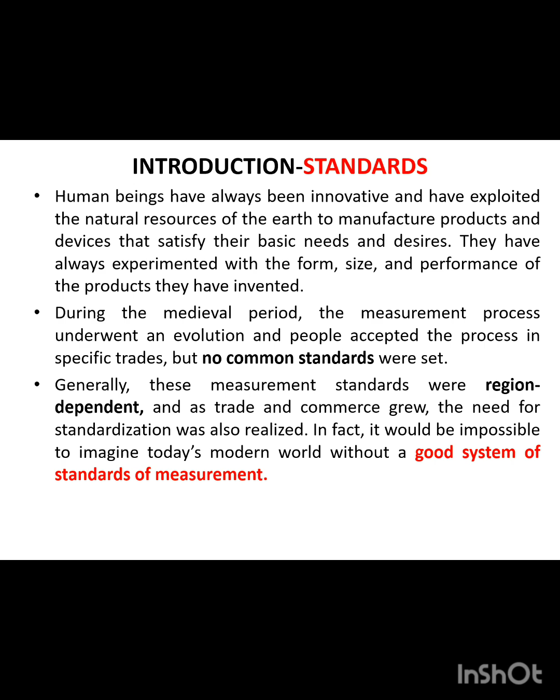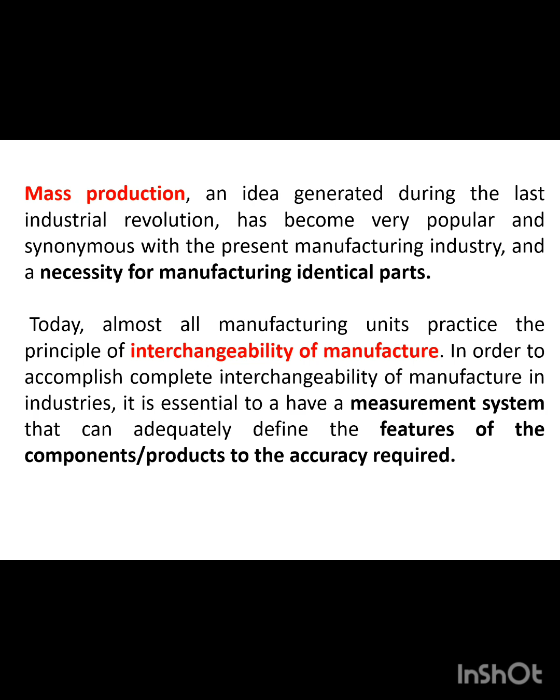Mass production, an idea generated during the last industrial revolution, has become very popular and synonymous with the present manufacturing industry and a necessity for manufacturing identical parts. Today, almost all manufacturing units practice the principle of interchangeability of manufacture. In order to accomplish complete interchangeability of manufacture in industries, it is essential to have a measurement system that can adequately define the features of the components, products, to the accuracy required.

In order to make measurements a meaningful exercise, some sort of comparison with a known quantity is very essential. It is necessary to define a unit value of any physical quantity under consideration such that it will be accepted internationally. It is not sufficient to only define these unit values of physical quantities. These should be measurable. A standard is defined as the fundamental value of any known physical quantity as established by national and international organizations of authority, which can be reproduced.

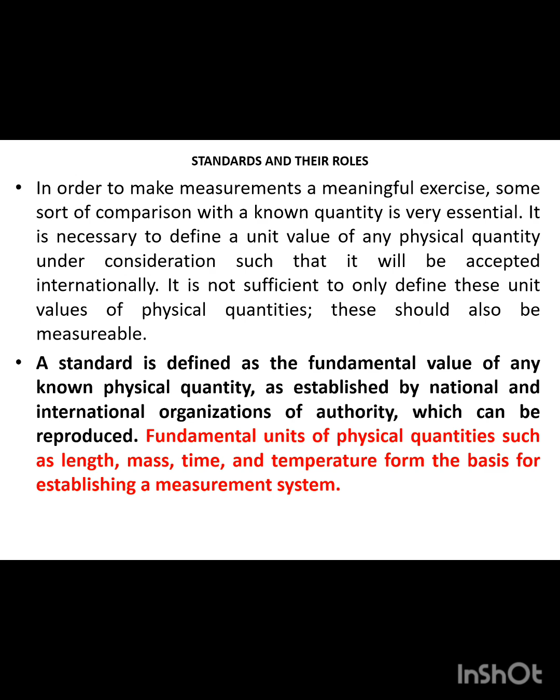Fundamental units of physical quantities such as length, mass, time, and temperature form the basis for establishing a measurement system. In the present world of globalization, it is impossible to perform trade in national and international arenas without standards. In fact, a good system of standards is essential for fair international trade and commerce. It also helps accomplish complete interchangeability of manufacture.

Adhering to globally accepted standards allows the manufacturer to convince the customers about the quality of the product. Standards play a vital role for manufacturers across the world in achieving consistency, accuracy, precision, and repeatability in measurements and in supporting the system that enables the manufacturers to make such measurements.

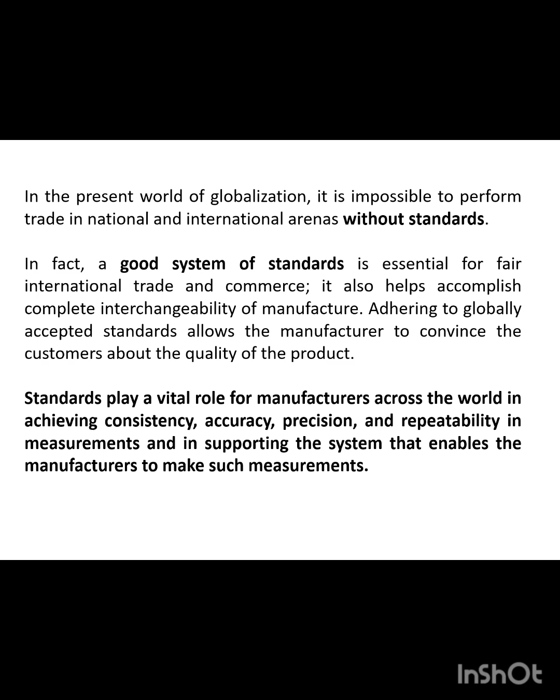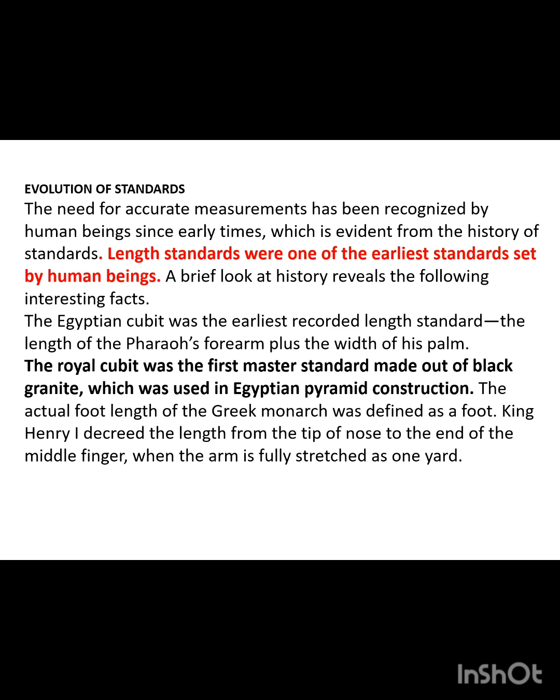Evolution of standards. The need for accurate measurements has been recognized by human beings since early times, which is evident from the history of standards. Length standards were one of the earliest standards set by human beings. A brief look at history reveals the following interesting facts. The Egyptian cubit was the earliest recorded length standard, the length of the pharaoh's forearm plus the width of his palm. The royal cubit was the first master standard made out of black granite, which was used in Egyptian pyramid construction. The actual foot length of the Greek monarch was defined as a foot. King Henry I decreed the length from the tip of the nose to the end of the middle finger, when the arm is fully stretched, as 1 yard.

One of the important prerequisites for progress in science is to gain mastery over the science of measurement. Any progress made in manufacturing and other business sectors in the international arena necessitates that activities at high scientific and technical levels be accompanied by progress in metrology. Further, automation in manufacturing industries demands a very high level of accuracy, precision, and reliability. It is pertinent to mention here that human beings' knowledge of nature and the universe, their adaptability to the purpose, and their ability to measure precisely provides a basis for the science of metrology.

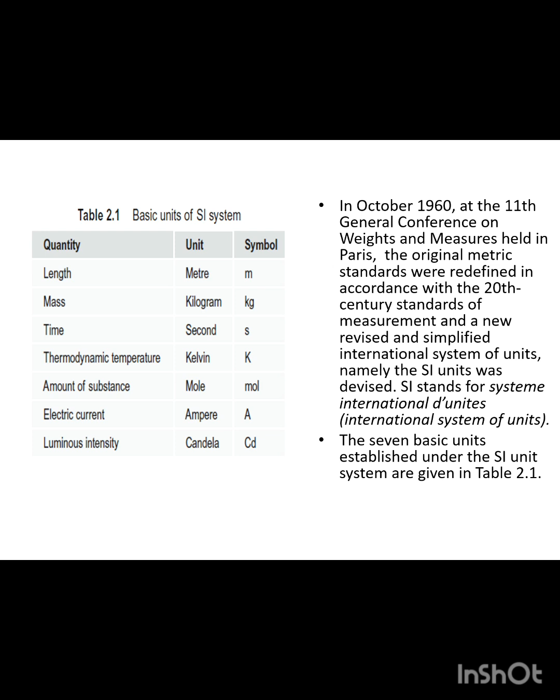Basic units of SI system. In October 1960, at the 11th General Conference on Weights and Measures held in Paris, the original metric standards were redefined in accordance with the 20th century standards of measurement, and a new revised and simplified international system of units, namely the SI unit, was devised. SI stands for Système International d'Unités, International System of Units. The 7 basic units established under the SI unit system are given in the table.

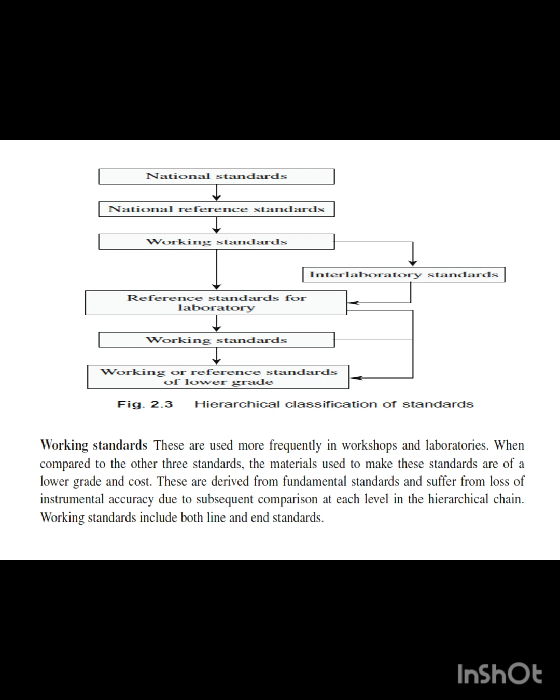Line and end measurements. We all know that sometimes distances have been measured between 2 lines or 2 surfaces, or between a line and a surface. When the distance between 2 engraved lines is used to measure the length, it is called line standard or line measurement. The most common examples are yard and meter. The rule with divisions marked with lines is widely used.

When the distance between two flat parallel surfaces is considered a measure of length, it is known as end standard or end measurement. The end faces of the end standards are hardened to reduce wear and lapped flat and parallel to a very high degree of accuracy. The end standards are extensively used for precision measurement in workshops and laboratories. The most common examples are measurement using slip gauges, end bars, ends of micrometer anvils, vernier calipers, etc.

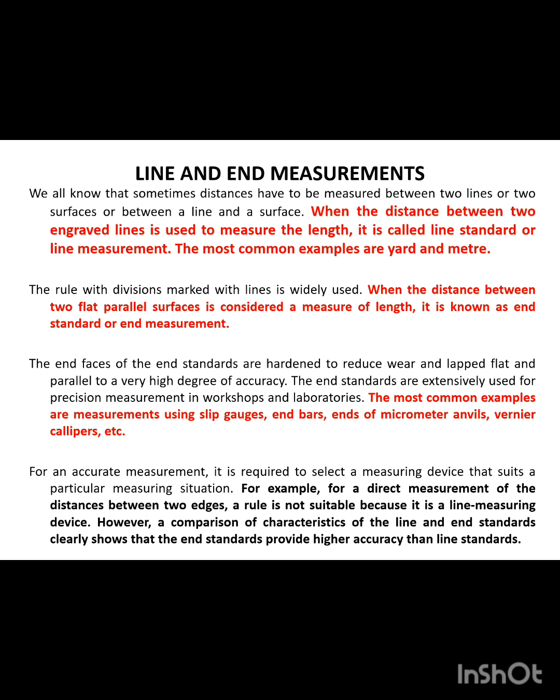For an accurate measurement, it is required to select a measuring device that suits a particular measuring situation. For example, for a direct measurement of the distance between two edges, a rule is not suitable because it is a line measuring device. However, a comparison of characteristics of the line and end standards clearly shows that the end standards provide higher accuracy than line standards. Characteristics of line standards. The following are the characteristics of line standards.

Measurements carried out using a scale are quick and easy and can be used over a wide range. Even though scales can be engraved accurately, it is not possible to take full advantage of the accuracy. The engraved lines themselves possess thickness, making it difficult to perform measurements with high accuracy. The markings on the scale are not subjected to wear. Undersizing occurs as the leading ends are subjected to wear.

A scale does not have a built-in datum, which makes alignment of the scale with the axis of measurement difficult. This leads to undersizing. Scales are subjected to parallax effect, thereby contributing to both positive and negative reading errors. A magnifying lens or microscope is required for close tolerance length measurement.

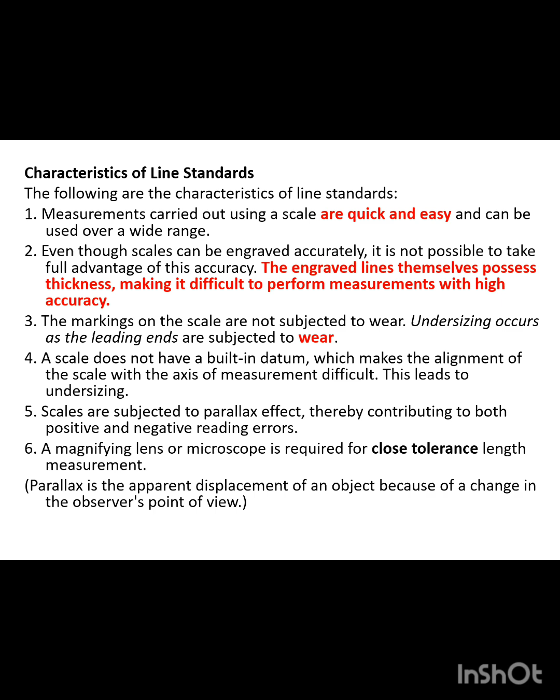Characteristics of end standards. End standards comprise a set of standard blocks or bars using which the required length is created. The characteristics of end standards are as follows. These standards are highly accurate and ideal for making close tolerance measurement. They measure only one dimension at a time, thereby consuming more time. The measuring faces of end standards are subjected to wear.

They possess a built-in datum because their measuring faces are flat and parallel and can be positively located on a datum surface. Groups of block or slip gauges are wrung together to create a required size. Faulty wringing leads to inaccurate results. End standards are not subjected to parallax errors as their use depends on the feel of the operator. Dimensional tolerance as close as 0.0005 mm can be obtained.

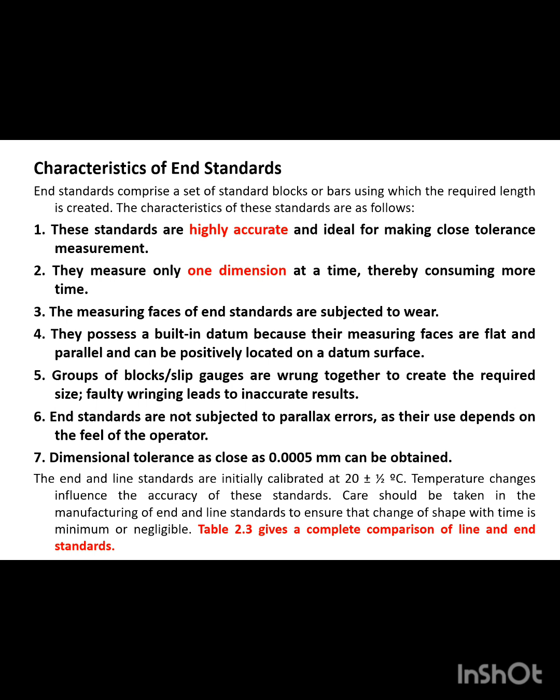Wavelength standards. It is very clear from the methods discussed earlier that comparison and verification of the sizes of the gauges pose considerable difficulty. This difficulty arises because the working standard used as a reference is derived from a physical standard and successive comparisons are required to establish the size of a working standard using the process discussed earlier, leading to errors that are unacceptable. By using wavelength of a monochromatic light as a natural and invariable unit of length, the dependency of working standard on the physical standard can be eliminated.

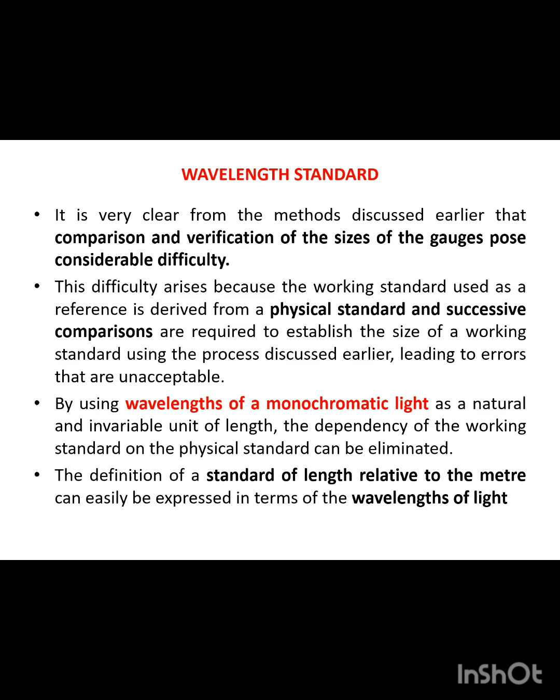The definition of a standard of length relative to the meter can easily be expressed in terms of wavelength of light. The use of interference phenomena of light waves to provide a working standard may thus be accepted as ultimate for all practical purposes. However, there are some objections to the use of light wavelength standard because of impossibility of producing pure monochromatic light, as wavelength depends upon the amount of isotope impurity in the elements.

However, with the rapid advancement in the field of atomic energy, pure isotopes of natural elements have been produced. Cadmium 114, krypton 86, and mercury 198 are possible sources of radiation of wavelength suitable for the natural standard of length. There is no need to preserve the wavelength standards as it is not a physical one. This standard of length is reproducible and the error of reproduction can be of the order of 1 part in 100 million.

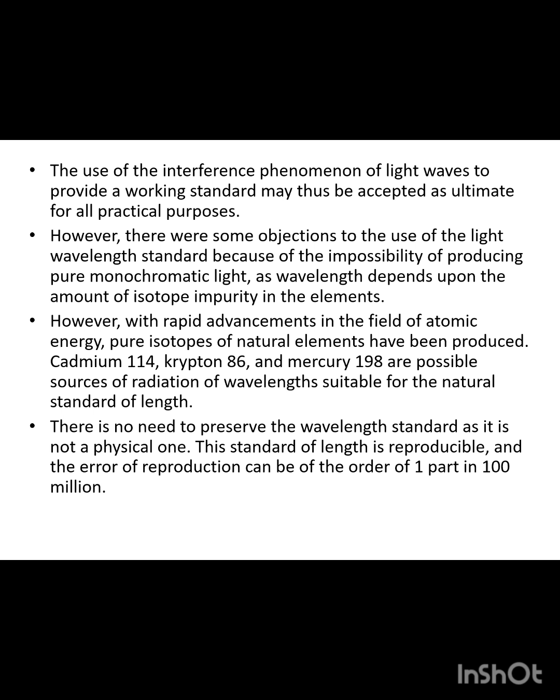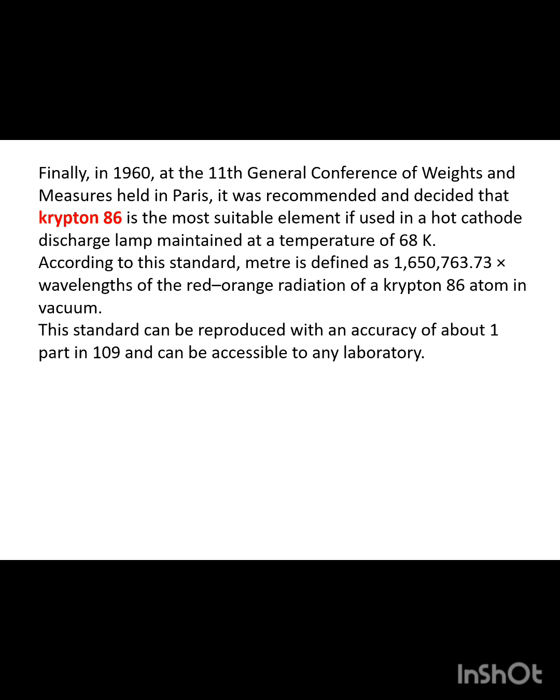Finally, in 1960, at the 11th General Conference of Weights and Measures held in Paris, it was recommended and decided that krypton 86 is the most suitable element if used in a hot cathode discharge lamp maintained at the temperature of 68 Kelvin. According to the standards, the meter is defined as 1650763.73 wavelengths of the red-orange radiation of krypton 86 atom in vacuum. This standard can be reproduced with an accuracy of about 1 part in 10^9 and can be accessible to any laboratory.